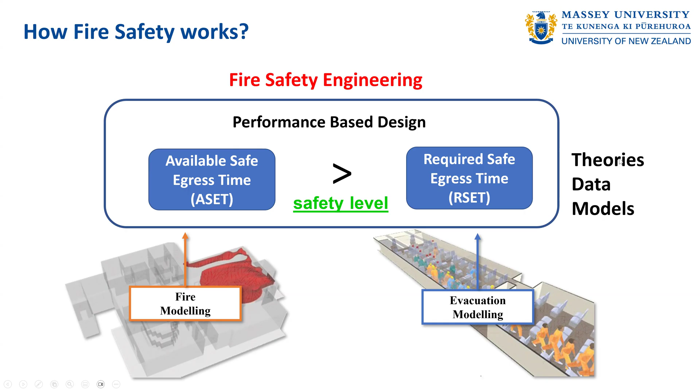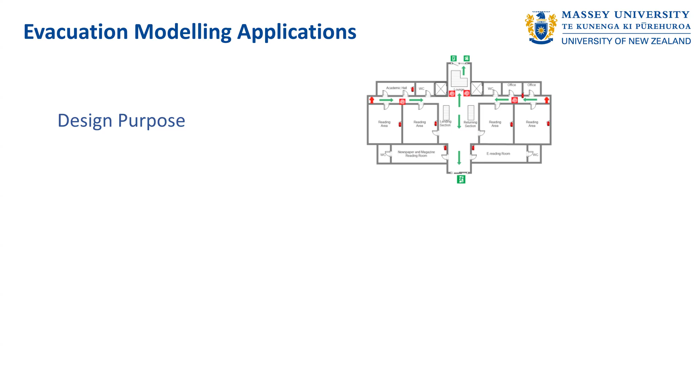So as you can see in this slide, there is a lot of theory, there is a lot of data, and then we need to try to connect the theory and data to the modeling exercise we are trying to do. Evacuation models were generally born to support the design of buildings, but there is a big overlap between evacuation models and pedestrian dynamics tools. If you remove pre-evacuation time and all the emergency side, you will soon realize that the same tools can be a really good tool for crowd management, to assess congestion during crowded events.

So you might expect that a lot of the tools like Pathfinder, which were born as fire evacuation models, can today be used for big events. And one of the upcoming events where I'm envisaging a lot of crowd studies will be FIFA 2026.

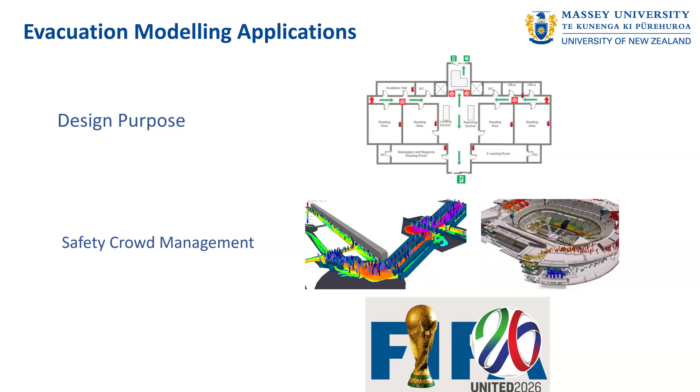Of course, we have been using those models also for forensic analysis, and this is one of the key videos showing one of the major case studies. This is the simulation of the evacuation of the Station fire in the USA. It's a disaster in a discotheque that resonates quite a lot with the Crans-Montana fire that we saw at the beginning of this year in terms of all the things that could go wrong.

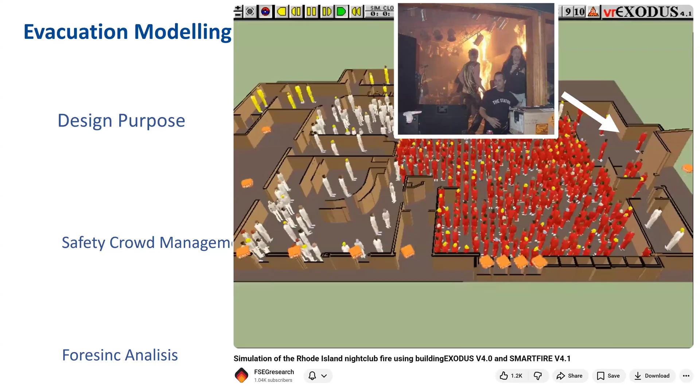And this is just one of the simulations done by the team of Ed Galea showing how we could use, over 20 years ago, evacuation models connected with fire models to make good estimations of how many people would end up perishing in this disaster, and to identify other scenarios, like what if everyone was aware of this other exit, to understand what could have gone better and what ended up going really wrong.

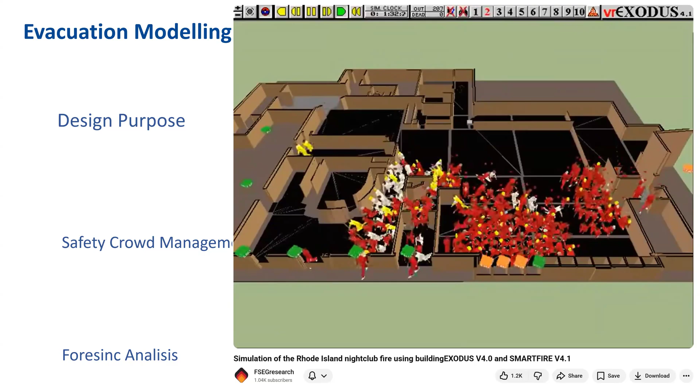So I've been using evacuation models myself to do dissemination. This is one of the top videos that I published on YouTube. It has reached nearly 90,000 views. And I also did a follow-up video showing how Pathfinder could be used to recreate the bottleneck that we saw in the Crans-Montana fire. So there is a lot of potential in this tool for educational purposes, going beyond what we do traditionally for fire protection engineering.

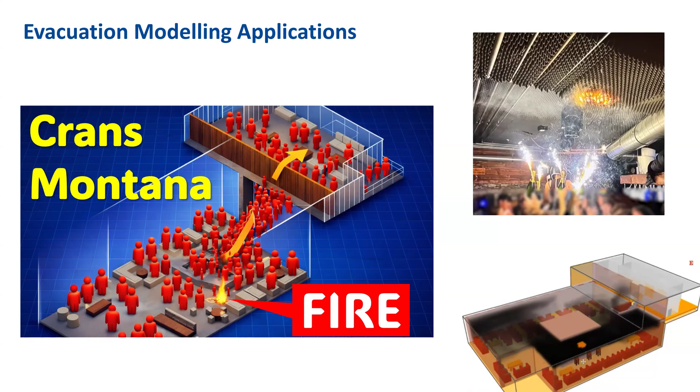So how do people behave? That's the key question that we need to answer when we do evacuation modeling. And if you go around and talk with average people, the answer is always going to be the same: people panic. This is something that belongs to the education that we receive indirectly from Hollywood movies, and the misjudgment of what happened in disasters by the media.

So people think that people are going to start going crazy, doing really nasty things, pushing each other. In fact, it's the first thing that you will read if you check media outlets. If you do it today and try to retrieve information on the latest disaster that happened, you will find a lot of headlines with panic, panic, panic.

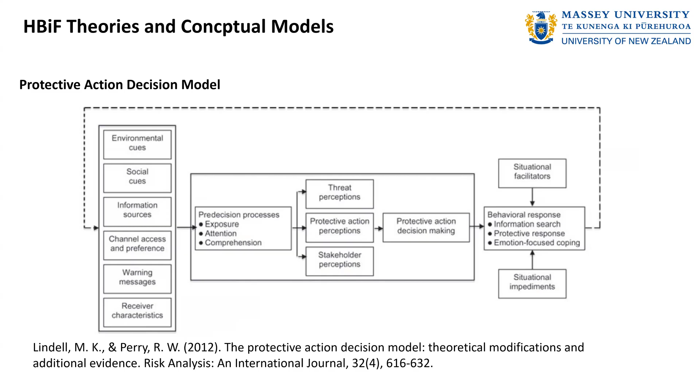Still, it's a really good model that can help us put a lens on how people internalize all the cues—physical cues, social cues—and then make a response to the situation they're facing.

A really good simplification from an engineering point of view was the model proposed by Reneke in 2013. I love that paper. It's a NIST report that basically tries to convert, in an engineering way, how people internalize all these cues and transform them into a level of risk perception.

This is an image that I created in my paper in which I try to calibrate this model. It gives you a simple understanding that based on the stimuli you receive, risk perception might go up and down. It depends on what you perceive. And eventually, if we cover a specific threshold, people will feel unsafe enough to start evacuating.

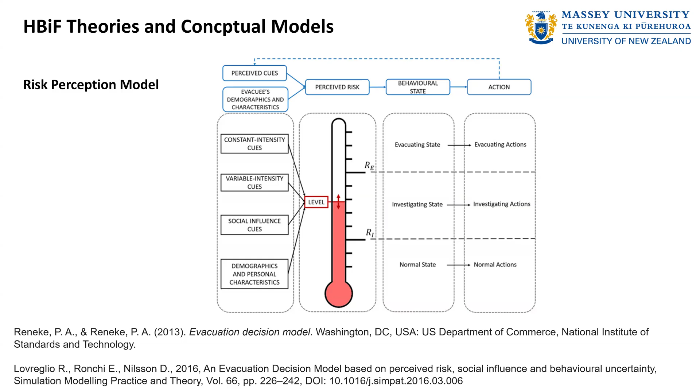But if you think through regulation and what we do in evacuation models, we actually use this concept, but it's basically hidden behind the scenes.

Risk perception can definitely help us explain a lot of behavior that might not make sense if you know what happened in a disaster and then watch from a couch what was unfolding in a real disaster. In this case, the fact that we saw, for instance in the Crans Montana fire, teenagers, really young kids, taking video of the fire is not related to madness. It's related to a really low risk perception and misjudgment of what was about to unfold.

Because, of course, in many buildings you don't have fire protection engineers who have been in many experiments to see what happens if we ignite a foam acoustic panel and how fast it's going to spread through the building.

So you see behavior like recording what's happening in a fire, or the fact that people evacuate from flights always carrying their suitcase. It's always a matter of underestimating the real threat you might end up facing if you delay your evacuation to collect your belongings. And it's something we keep seeing more and more.

That's why we need to refocus quite a lot of what we do with safety training, to tell people not just 'don't panic,' but make sure you do A, B, C, and understand how much time you will have in case there is a fire. It's not like a luxury of 10 minutes to evacuate a building. Sometimes we have seen in major disasters that the time will be 60, 90 seconds.

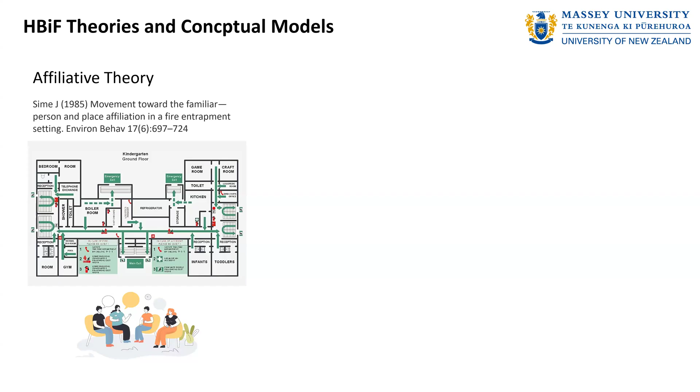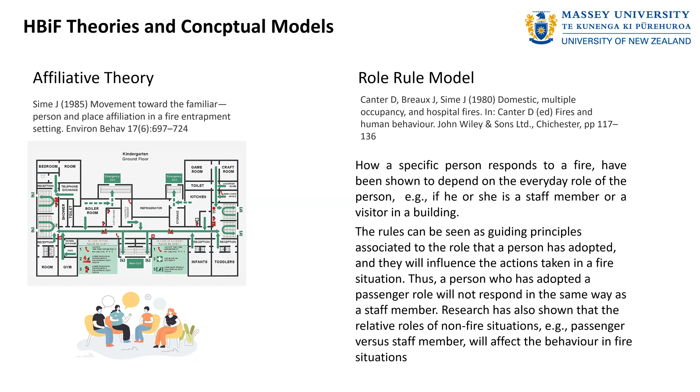That's another reason it's important for people inside the scene to give instructions, because if someone has authority before a fire, like a teacher or a building manager, they will be listened to much more by people. We have also done experiments showing that if there is an instructor telling a person 'please go this way,' it can really have a huge difference on what people will end up choosing during the evacuation.

So you can understand that, especially in some situations, a few quick responses from key people might make a dramatic difference in the outcome of a disaster.

So once again, it's something we are well aware of, and we need to make sure whenever we do design that we don't put stuff that impairs the evacuation, especially the main pathway to escape and to get in and out that people are familiar with.

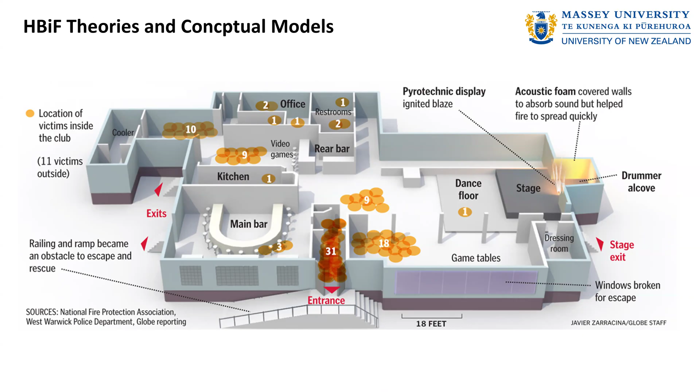Social influence plays another key impact. We are affected by other evacuees in an environment, and there are two types of social influence. Normative social influence is what you experience when an alarm goes off and everyone feels awkward. They don't want to start evacuating because they want to belong to the norm that everyone else is not doing anything, so it's better not to look foolish or like the loser in the scene.

The reality is that we are somewhere here and now. We are in this historical period of fire protection engineering, where the fire protection engineer needs to define the scenario and the actions of the evacuee in an evacuation model. Ideally, in the future we would just set up the scenario and have smart evacuation models with agents capable of behaving like real humans, mimicking their behavior. Are we close to that? We are still years, miles away from this achievement.

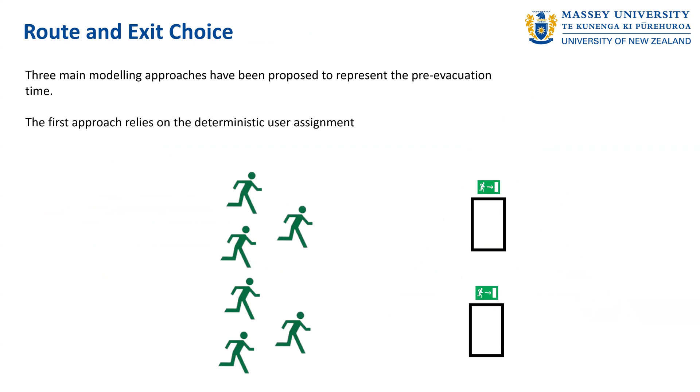What about exit choice? If you use standard models, you will see that many basic exit choice assumptions make the evacuee go to the closest exit. So basically they estimate the shortest path, and then you have the evacuee running through the shortest path. But we already mentioned that this is not really the case, because there is much more affecting the behavior. We also have the possibility in these models to have a probabilistic assumption. So you can say 80% of the participants might end up using the main exit, and the other 20% end up using different exits.

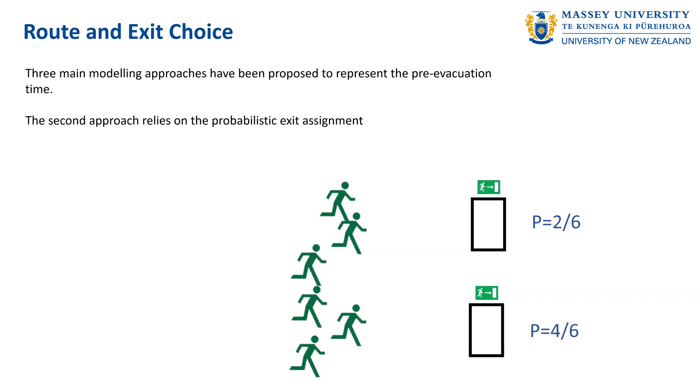So we can make assumptions using probabilities, but we can also go beyond this simplistic approach. We can also start thinking about models, and we have been developing and proposing different models along this line, assessing what will be the probability of a person choosing one exit rather than another. How can we make this estimation?

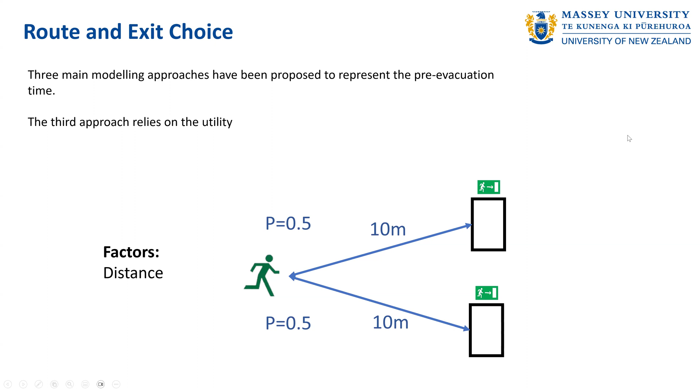We have been analyzing a lot of evacuation experiments and a lot of virtual reality experiments in which we put people in different layouts, at different distances from the exit, and in different conditions in which we change the location of the people, and we start putting cues like smoke coming out of an exit, or other people already using this exit, and ask people which exit

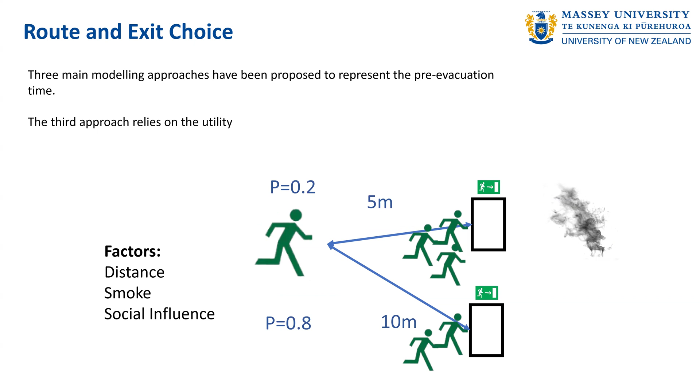you will choose. So based on this data, we now have exit choice models that can be used within evacuation models that allow us to do real-time assessment of the situation and have smart agents that can choose the exit based on what a human would do in a similar situation. From a navigation point of view, I would say that this is probably not one of the major headaches that we have to go through.

There is a lot of stuff that has been proposed, and from a macroscopic point of view, the fluid dynamic model that you will see in the SFPE handbook has been one of the most popular for hand calculation with just a piece of paper. You can assume that people behave like a fluid. You have a flow rate from an exit. You make some assumptions about the evacuation. Just with a piece of paper or with Excel, you can estimate how long it will take to evacuate a specific environment.

But then there's been a huge exponential growth of computer evacuation models in the last 20, 30 years. And they are based on continuous assumptions. Back in the day, we used to have discrete models that work like a chessboard, in which the agents move from one cell to another. I must say that these models are becoming less and less popular, because back in the day, the only reason behind the scenes was that it was extremely computationally demanding to have a continuous model.

But with the computers and hardware that we have now, using a social force model or steering model is no longer a big issue. In fact, with Pathfinder, you can have tens of thousands of evacuees run on a single laptop. This was basically impossible back when I started doing evacuation modeling, and for tens of thousands it would probably only have been possible using cellular automata models. The world has been shifting from a technology point of view.

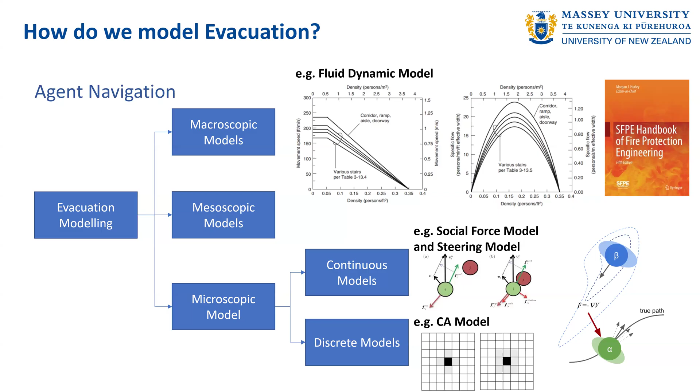And of course, there were also mesoscopic models proposed back in the day, trying to find a compromise when there are too many evacuees, between places where we don't really care to be detailed about what's happening in this corridor, where we know the flow rate will be roughly this one, and using instead the microscopic model when there is a bottleneck, to analyze what's happening in specific critical places.

So if you want to see the hydraulic model, you can go to the latest version of the SFPE handbook, and in chapter 59 you will see the standard equation that is also implemented in Pathfinder, in which the relationship between speed of people and density is constant at the beginning, because with low density there is no impact on a person's speed. It's basically an unconstrained speed.

And you will see that after a specific level of density, you may expect people to slow down. But is this a real phenomenon? In reality, no, because we know that we can reach higher density. And you'll see that with higher density you have a stop-and-go phenomenon, in which you still have flow rate, even though the density is much higher than 0.5 or 0.6.

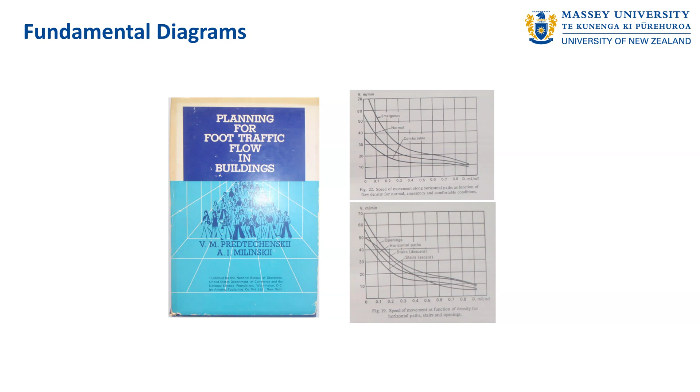Another type of fundamental diagram, slightly different from the one proposed by the SFPE handbook, is the one proposed by the Russians Predtechenskii and Milinskii. In this case, it all works in terms of interpersonal distance. So we stop using the concept of density, which is a more engineering way to measure things in a crowd, and instead use interpersonal distance and the relationship between speed and interpersonal distance. You will see more about this in the new version of the SFPE handbook. Hopefully it's going to be out this year.

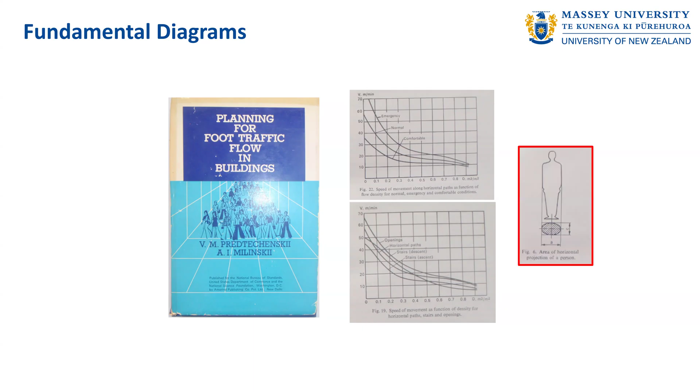And in this case, you will see something that basically gives you more insight into an alternative way to what we used to use with the previous version of the SFPE handbook. And if you go and see, there is quite a lot of new data that has been generated related to fundamental diagrams. So you can see that the SFPE handbook curve is basically an approximation, a design curve. It doesn't really represent the reality.

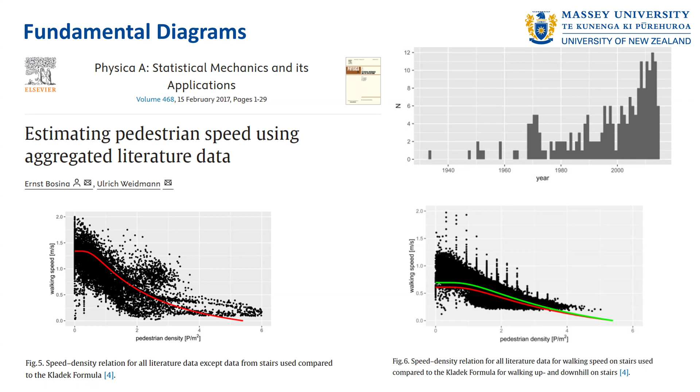And a place where I suggest people go if you want to see one of the latest reviews on all these pre-evacuation and movement data is this literature review from ETH. And you can see that there's been an explosion of studies observing how people behave and move in different crowd situations, in different kinds of buildings, in different contexts, with different participants and stuff like that.

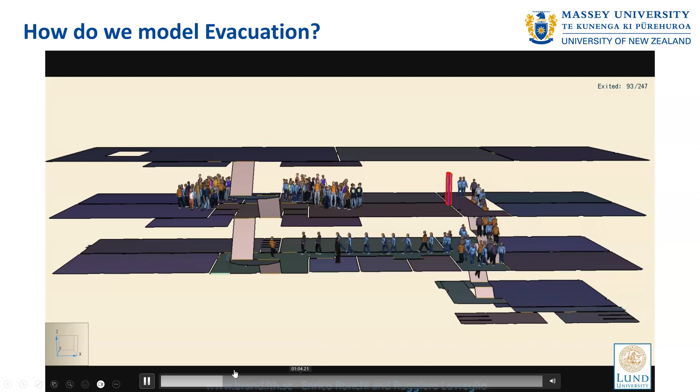And from an evacuation point of view, if you want to start using evacuation models, of course, there are a lot out there. This is a collection of videos that I made when I was still a PhD in Sweden in 2015. And it's just an example of evacuation modelling. This is Pathfinder. It was used by my supervisor, Enrico, to do evacuation of schools. So you can see here, you can simulate the evacuation of an entire group, in this case a classroom evacuating all together.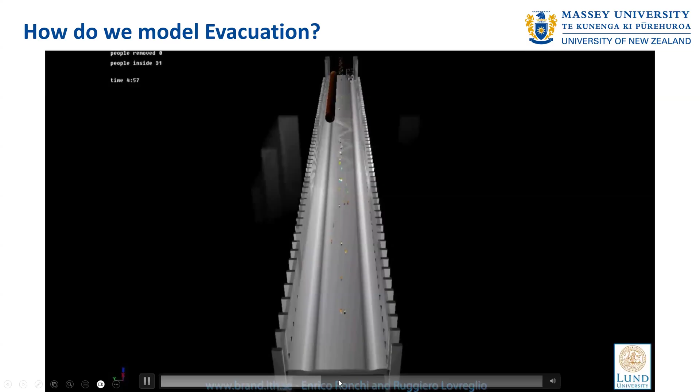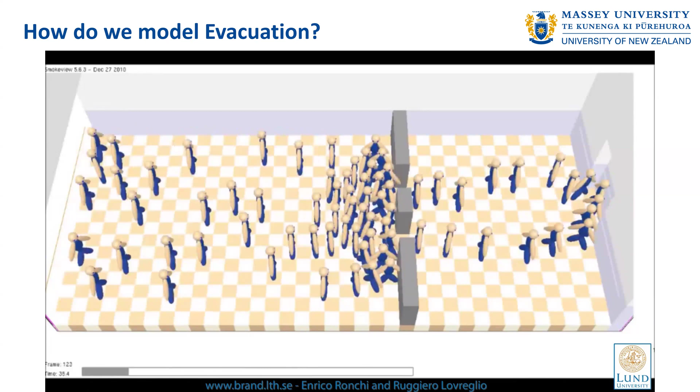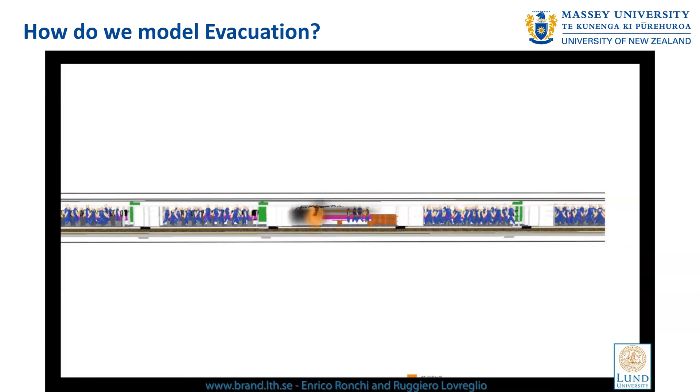Pathfinder, once again. We can also have game engines like Unity that allow you to do evacuation simulation today. This is another example done by Enrico using STEPS. And this was my first evacuation model ever. It's called EVAC, and it was within FDS. But unfortunately, since 2-3 years ago, it got kicked out of FDS because there was no one in Finland to maintain that code. But to be honest, it has been the evacuation model that I started using to learn the basics of evacuation.

So I left intentionally the last minutes of our presentation to give you a bit of an overview of different workflows that you can use in your models. This is a workflow that I published on my YouTube channel probably 4, 5, 6 months ago, and it has already been watched thousands of times. And I want to quickly show you how quickly it's now possible to set up an evacuation simulation starting from a simple PDF document, assuming there is not even a building information model. So I'm going to show you that I can do it in front of you within a few minutes.

So there are different workflows, of course, that you can use. And the thing that I found mind-blowing last year is the discovery of this AI-driven web application that is capable of doing segmentation and annotation of a PDF, figuring out where the walls and doors are, and generating an IFC document. IFC is basically a standard document for OpenBIM. It's something you can open and read as text. And I'm going to quickly show how we can integrate all this within Pathfinder and create an evacuation simulation within a few seconds. So I have Pathfinder open here.

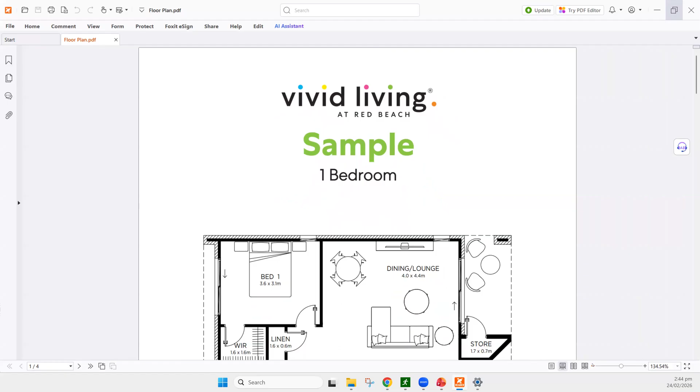So I'm going to use this file, something I just downloaded from the internet. I was looking for floor plans with different apartments. Let's open this one, a 2-bedroom apartment with a garage and two evacuation exits, 1 and 2, but it can be anything that is a PDF document. So let's go and open this file.

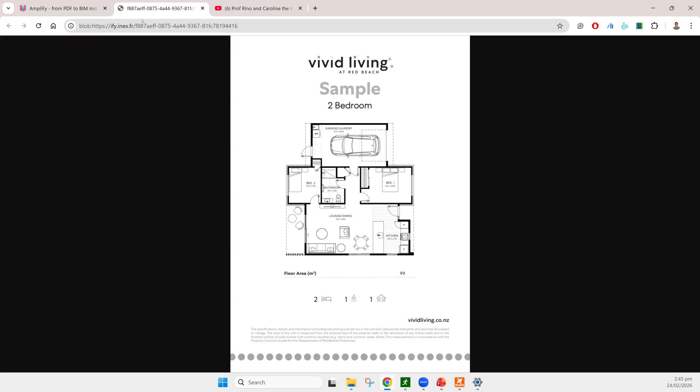And you can see that it's already identifying that there are different floor plans and is making the assumption that they belong to the same building at different floors. In this case, it's not the case. I'm gonna delete all the floors that are not actually floors and focus just on this specific file. So let's go and start.

You can see in real time the BIM version of this PDF has been already created with all the IFC. The key IFC elements that you need to have for this are gonna be IFC slab, IFC doors, IFC windows, and you can see also the room IFC elements.

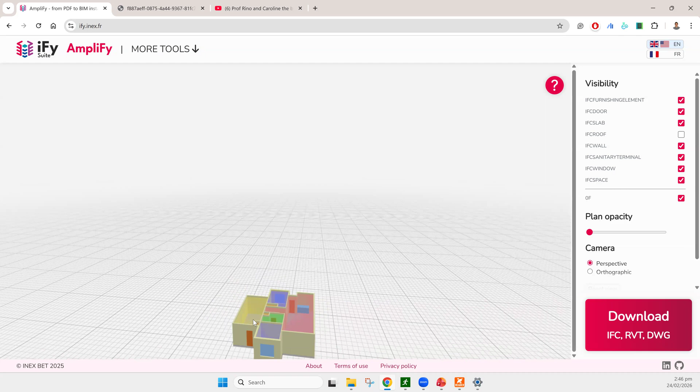So now we can also go and export it. In this case, I've already put all my information. They didn't charge me anything. And I agree with the conditions and download the IFC documents. And if I go in my working folder, you can see that the IFC document looks like this.

And if you never opened IFC documents, you can just use a notepad tool and you'll see the metrics behind an IFC documentation. So this is what an IFC file is. It's a bunch of lines that codify all the information of a building in a standard open format. And the good thing about having an open format compared with having a Revit format is that everyone then can use it as an input for their evacuation tools.

In this case, what I'm gonna do is just go to Pathfinder and import the IFC document. So you can see here it's already capable to see IFC documentation. The thing that you need to be careful here is to make sure that you use the right information in terms of scale, millimeter or meter. You will see in many cases that people change this, for instance, to millimeters while the file is in meters, and then the doors look tiny, like a fraction of a centimeter.

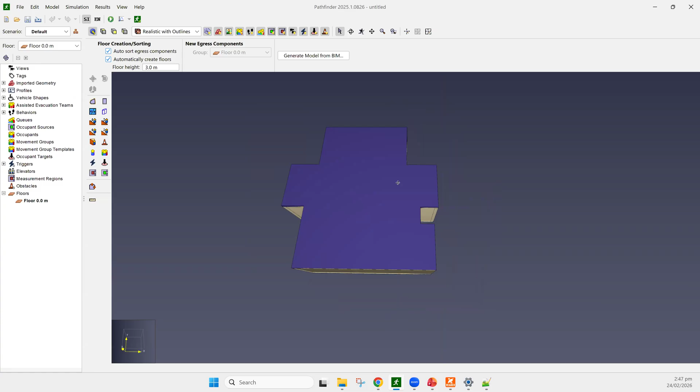So if you put all this information in the right way, you can see that the PDF that was unusable a few seconds ago, let me hide this part, has been converted into an IFC document, and now the IFC document is already within Pathfinder.

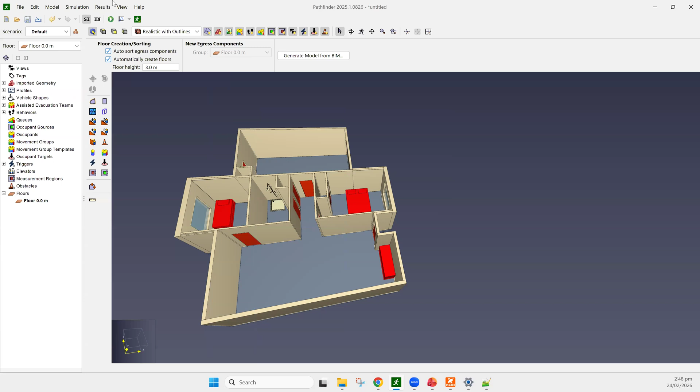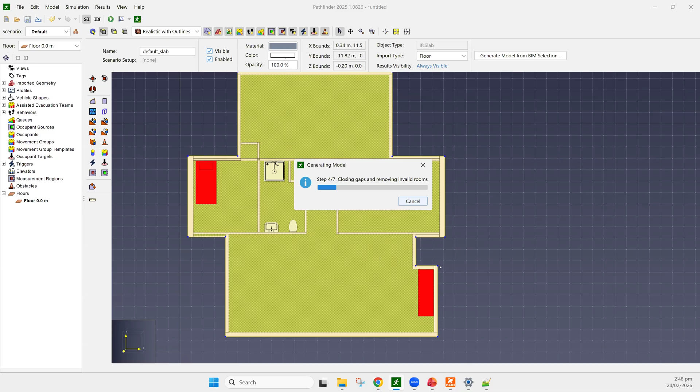How quick is it now to use this document and create an evacuation floor for Pathfinder? You might feel like you now need to go and do the drawing one by one. In reality, there is already a generate model from BIM selection. So once you just do right click, generate from BIM, you can see that we have already something ready to go. And to see it, we can just hide all the BIM stuff. And you can see that this is already the floor plan of Pathfinder, ready and good to go.

Do we need the geometry? Nah, it's just if you want to have something fancy in your visualization. Now we know that the evacuation exits were here and here. So the only thing that we need to do is to go and select the door tool. In this case, the door is 0.8.

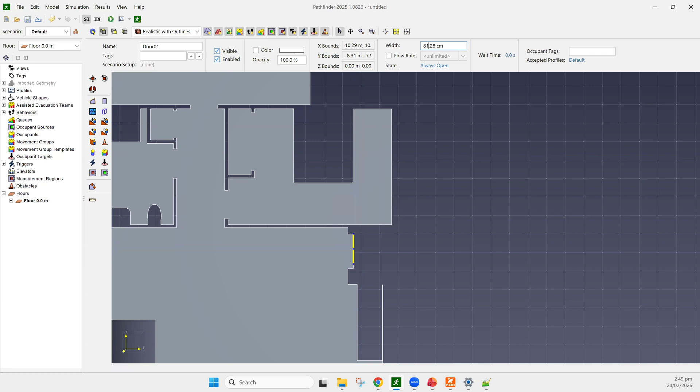I can expand it. I can even put a crazy number. Let's put 150. And you will see that the tool is pretty smart, it's not going to allow you to put something bigger. It's reaching the limits of this slab. And the same thing, we can start now putting an exit here, give it a really reasonable number, and it's good to go.

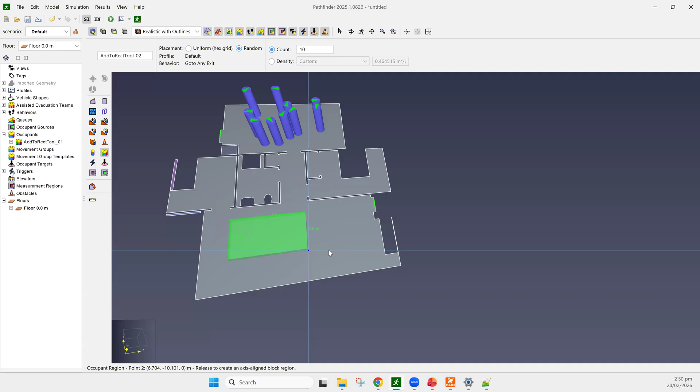So now we can go and just put the information about the agents. We can put a bunch of agents here, a bunch of agents in this area. And of course, then in Pathfinder, you have the possibility to add all the information about pre-evacuation times, behavior. What are the key components? Let's go from the top view. The two components to use are profiles and behavior.

Let's assume, for instance, that I want to put a pre-evacuation behavior for these agents. I'm gonna generate a new behavior. Let's call it behavior UQ. We select it, and then we can start adding actions. So you can see here, wait action. We can use a uniform distribution from 10 to 20 seconds.

So we have already generated a simple behavior that is going to have people with a pre-evacuation distribution from 10 to 20 seconds, and then reach any exit. In this case, you can even set up and decide yourself which exit you want to use.

And in my case, I always suggest people to be also mindful of the fact that people might end up using the familiar exit. In this case, it's an apartment, it doesn't really apply. Otherwise, I could have gone here and said, I'm pretty sure that these people will end up using door number 01. That is this one.

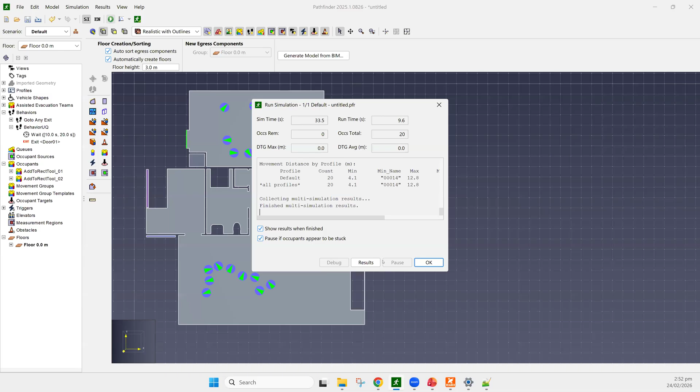I can now save the file, and within less than 10 minutes, I showed you how quickly, if you know how to use a really good workflow, you can end up passing from a simple, useless PDF file to an evacuation simulation that looks like this.

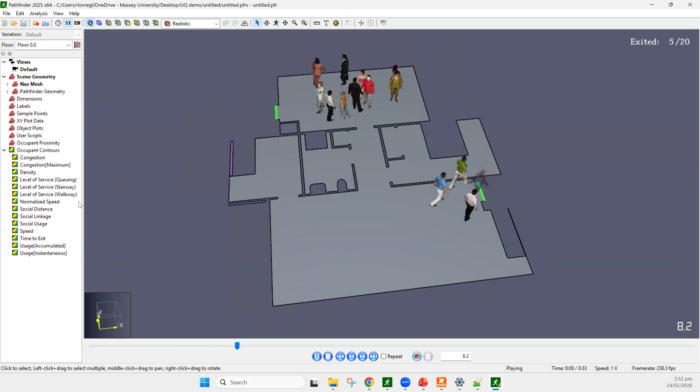So when I show evacuation simulations using Pathfinder, people get really excited, especially from the industry, who have no clue about evacuation models, because these agents look real. So they believe that the behavior of these people is real.

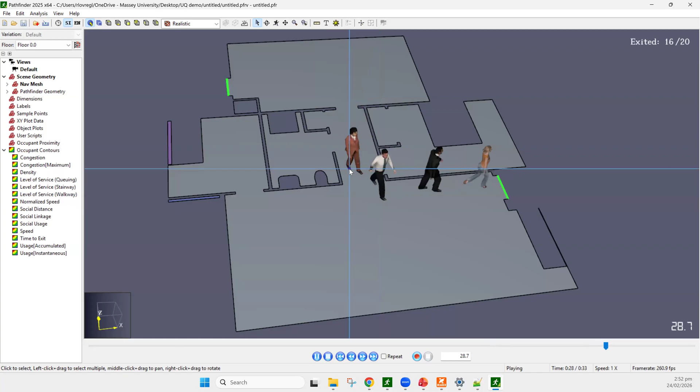You always need to explain that the fact that the rendering looks realistic doesn't mean that the behavior is realistic or not. As you can see, the behavior these people are using is strongly affected by what I told them to do. And there are many other features within Pathfinder that you can use.

Let me show you when I did this simulation for the Crans Montana fire. In this case, to make sure no people were passing through the fire from this area and instead using this area, you see this black line here - that's me enforcing a wall to make sure no one was passing through the fire.

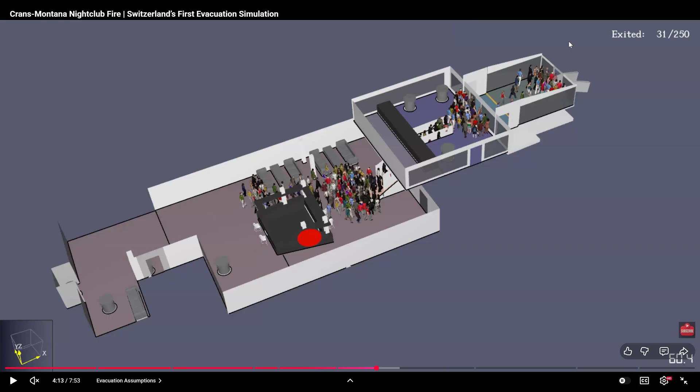Also in that case, when I opened this exit, I was observing really bizarre behavior - someone right here was trying to go down to use this exit while everyone else was going up. So my adjustment was using common sense: if you're here, you're most likely going to follow the flow, you're never going to end up downstairs unless you're staff or have a really strong motivation to do it. So I had to manually set this bunch of people to go to this exit, otherwise I was observing really bizarre stuff.

This is where the engineer needs to put his hands, because we can't just set the scenario and assume everything will go perfectly. You need to make some stronger cuts here and there to make sure the simulation actually represents something that makes sense. My workaround was setting up obstacles with increasing resistance - the closer they got to the fire, the less they wanted to go in that direction. That's another alternative you can use. It's a bit like, as much as you know the tools, you try to recycle what's in there to replicate what you really want to do.

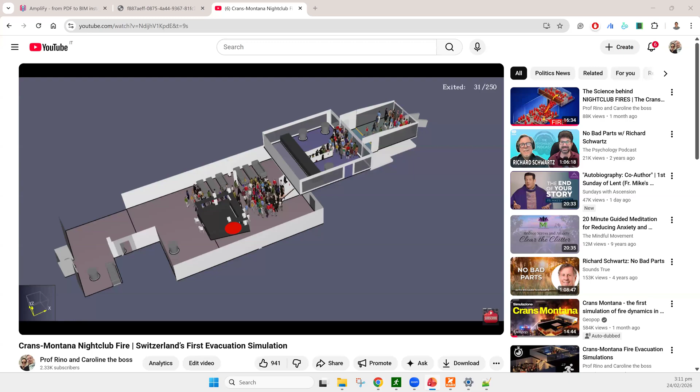They are really customizable, thank goodness, this software now. When I was using Pathfinder 10 years ago, it was already beautiful to have something that looked realistic, but it was extremely simplified. I hope the next step for them will be to do more work on coupling, but it's an active group - I know they're always trying to implement it. In every release you see something new, so it's just a matter of time. I know it's on their to-do list - it's been on their to-do list for so long - and hopefully we'll soon have automatically fed calculations, automatic slow down and change of exit in case of different visibility of fire and stuff like that.

But yeah, well, thanks for your time, Rino. Don't worry.